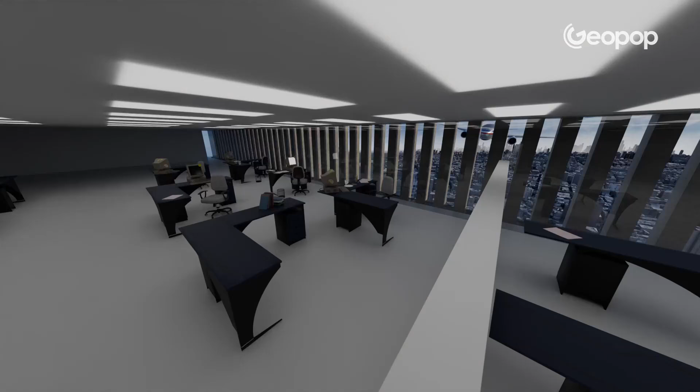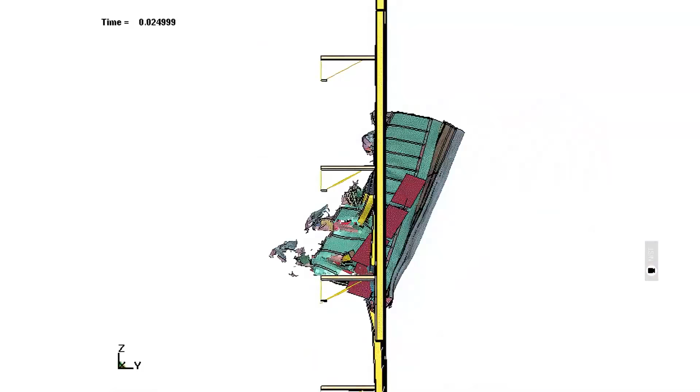See the engine and wings crashing into the building? These simulations of the impact really are shocking, and they aim to explain the reasons behind the most widely discussed collapse in history. What really caused the collapse of the Twin Towers?

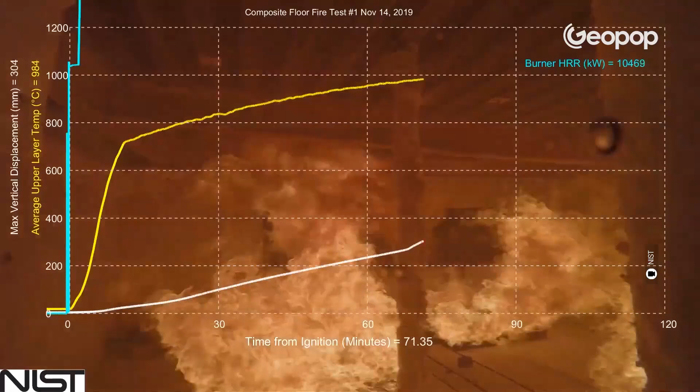How is it possible that they only took about 10 seconds to collapse? And what do we know about the much debated steel temperature issue? And what's more, several hours later, why did Tower 7 also collapse even though it wasn't hit by a plane?

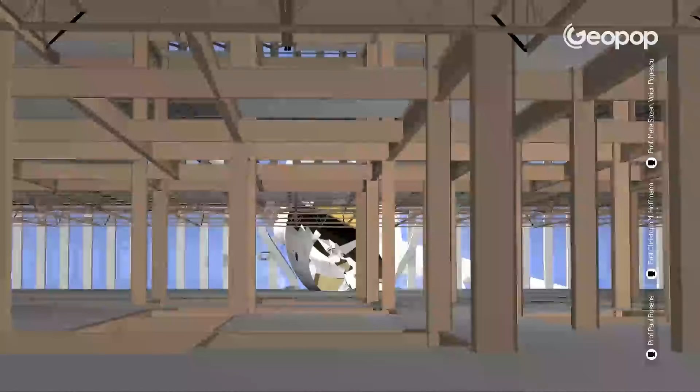Those of you who have been following Geopop for a while will know that we've made a number of videos on the World Trade Center disaster of September 11, 2001. In order to give you the most reliable and consistent scientific explanations possible, to provide further clarity, we've decided to put all the content created by our editorial team over the years together in a single video to try to answer the questions and address the aspects that have most fueled conspiracy theories about the attacks that literally changed history.

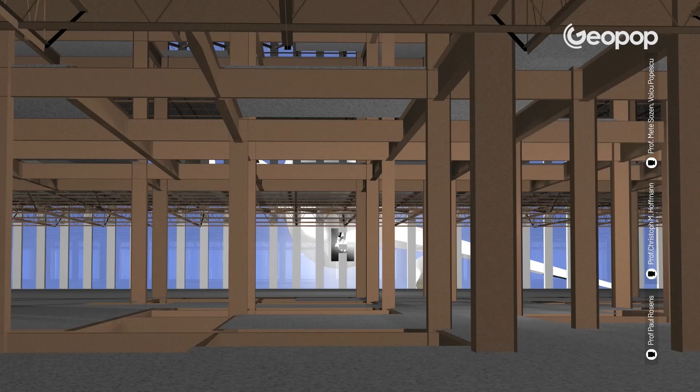I want to point out that nobody actually knows the absolute truth about what happened that day. Here we present you with the version that is most widely accepted by scientific experts, the one put forward by the NIST, the National Institute of Standards and Technology, one of the most prestigious scientific institutes in the United States. It analyzed thousands of witness statements, pieces of video evidence, photographs, and fragments of debris collected from the Ground Zero site, simulating scenarios in the laboratory similar to what happened that day to the towers.

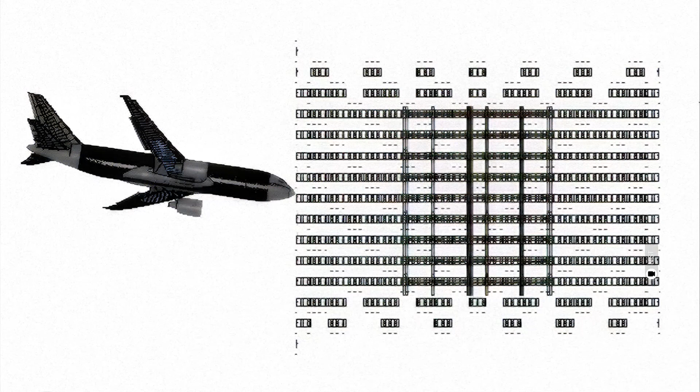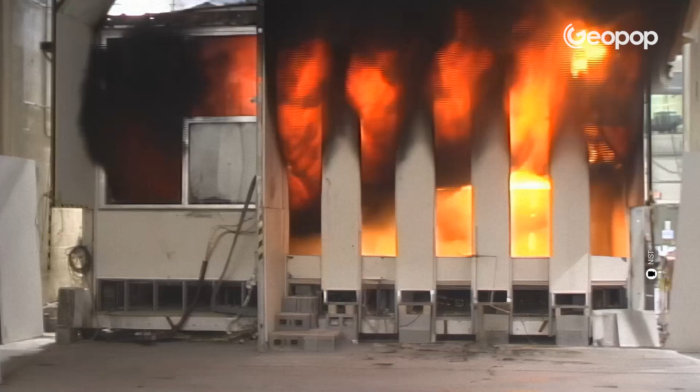So, understanding how the two buildings were designed and built is essential to comprehending the dynamics of the collapse, which, according to the NIST, was not directly caused by the impact of the planes, but was triggered by the subsequent failure of the steel due to the very high temperatures reached in the impact zone floors. But let's work our way through it methodically.

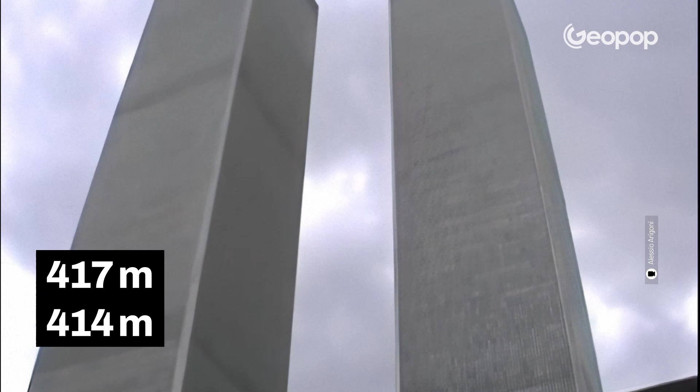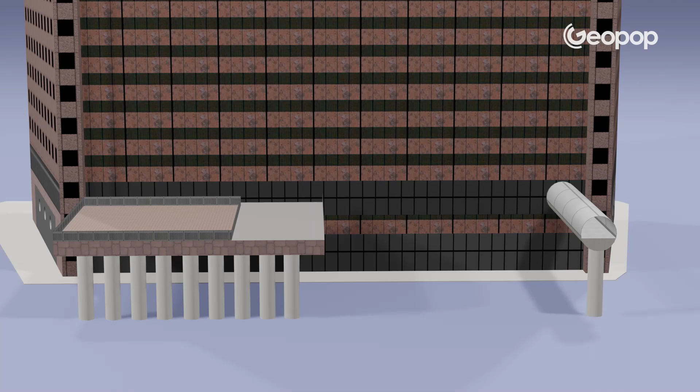Standing at 417 and 414 meters, respectively, each of the two buildings had 110 floors and was composed of 250,000 tons of steel. At the time, they were the tallest skyscrapers in the world, as well as the beating heart of the World Trade Center, designed by architect Minoru Yamasaki in 1962 to become a revolutionary economic hub, which was why it was called the World Trade Center, and which also included Tower 7, or WTC7, the third building that collapsed on the day of the attack, which housed the electrical substation that supplied power to the entire World Trade Center complex.

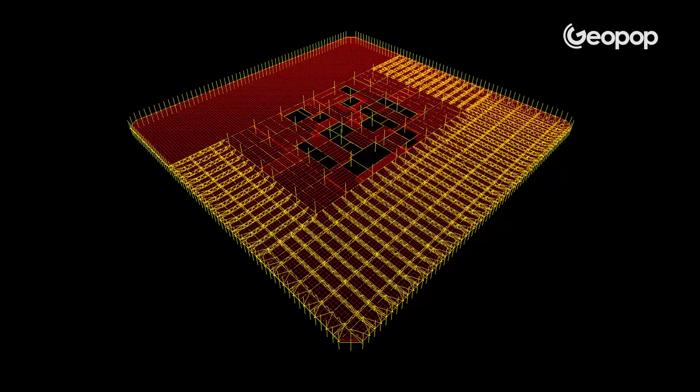Using steel to construct skyscrapers is one of the best ways to create ultralight structures that can be developed vertically. The basic idea was to make each floor a huge open space, uninterrupted by columns and support walls. For this to be achieved, the mass of the building had to be minimized, and it had to be able to support the vertical load, that is, the load of the people plus that of the structure itself, and the horizontal load, that is, the force of the wind.

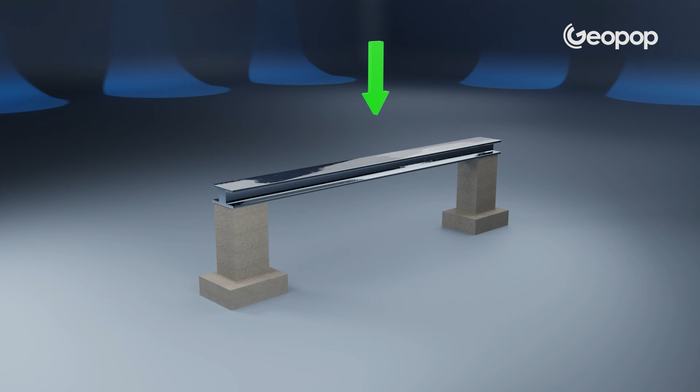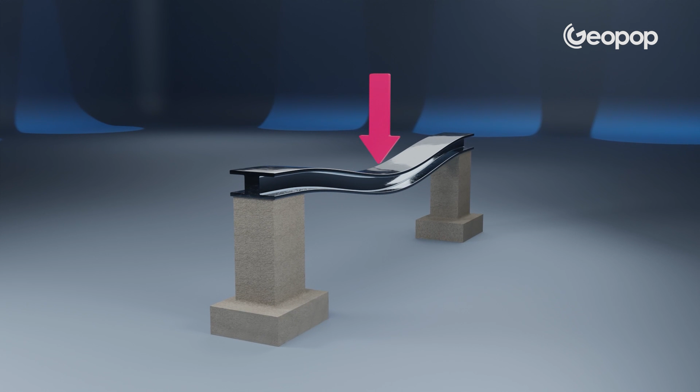Why steel? Because steel has elastic properties that allow it to react to loads with flexibility, but when subjected to high temperatures, it can weaken to the point of completely losing its ability to withstand certain loads, just as it did in the towers' case.

Holy shit! What happened? Oh my God! Oh my God! Oh my God! Oh my God!

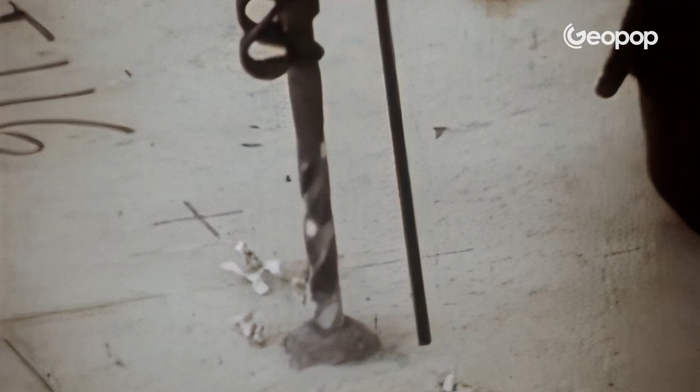Let's take a closer look at the structure of the towers. The structure was organized into four so-called major subsystems, four blocks that provided the building with structural redundancy or robustness, which made the towers very stable because, in the event of damage to one of the systems, the load would be redistributed to the other systems that were still intact. It's essential that this be explained if we want to understand the cascade of events that caused the steel to weaken.

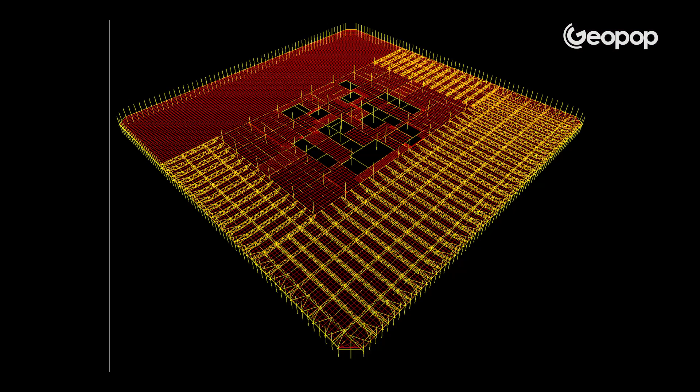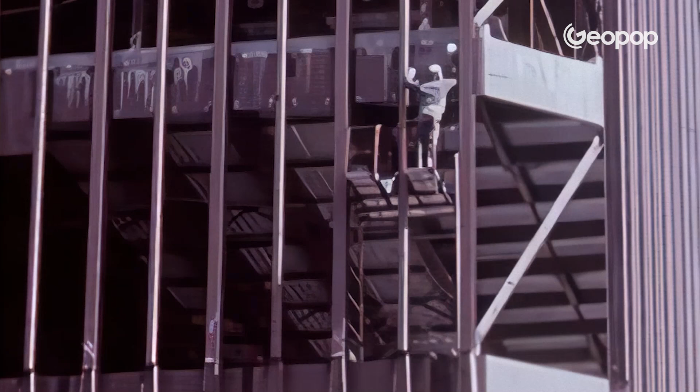The four subsystems were the exterior wall perimeter columns, the central core, the floor system, and the hat truss, essentially the roof. The perimeter columns were arranged along the perimeter of the building and provided resistance to lateral loads. There were 59 on each side, for a total of 236 around the entire perimeter. The central core was about 1,000 square meters in size and was located at the heart of the building.

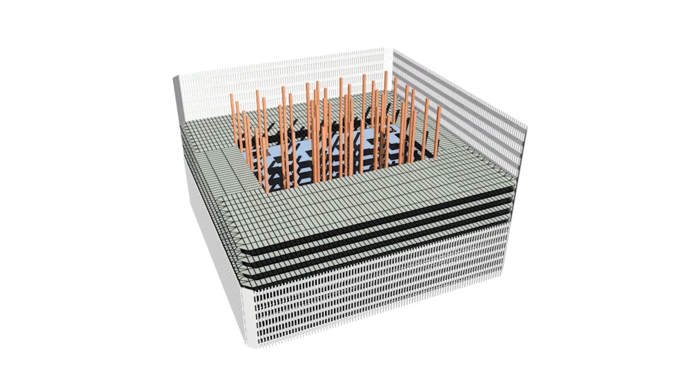It extended for practically the entire height of the tower, and inside there were another 47 support columns and service elements such as stairs and elevators. The third subsystem, the flooring system, was composed of lightweight concrete slabs fixed on steel platforms. The floor had the double function of supporting the perimeter columns and carrying part of the horizontal and vertical loads.

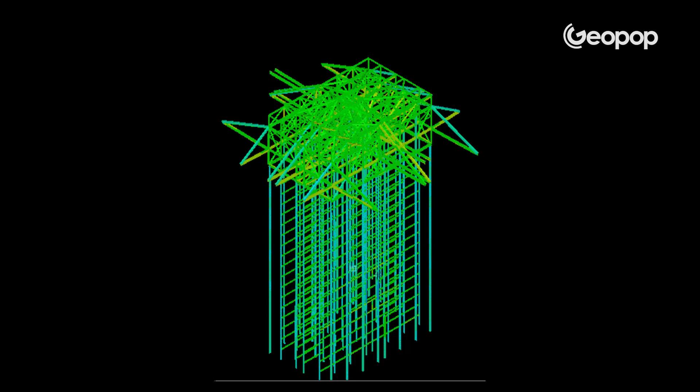Finally, the fourth subsystem, the hat truss, the roof structure, had the primary function of supporting the antennas, but it was also important in load distribution, as it provided an additional connection between the perimeter and the core structure. The North Tower and the South Tower of the World Trade Center were designed to withstand an additional one-third load. In addition to the gravitational load and the horizontal load, that of the impact of a 707 airplane, which in the 60s and 70s was the largest in the world.

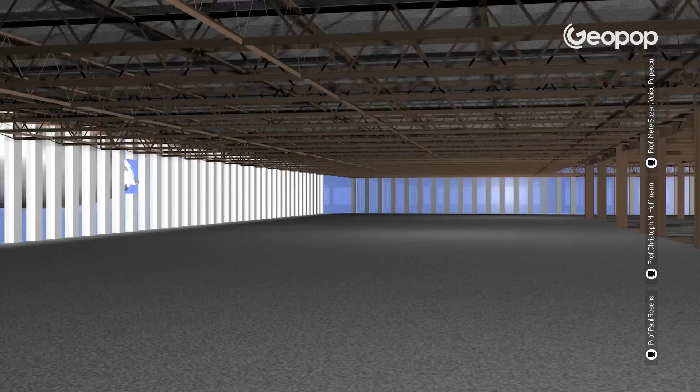Even though the American Airlines 767, the one that crashed, was much larger than a 707, the NIST specifies that it was not the impact itself that weakened the structure, which, on the contrary, only swayed by 30 centimeters. However, in a certain sense, it was the spark that triggered a series of contributing factors that eventually weakened the steel of the two buildings to the extent that they collapsed.

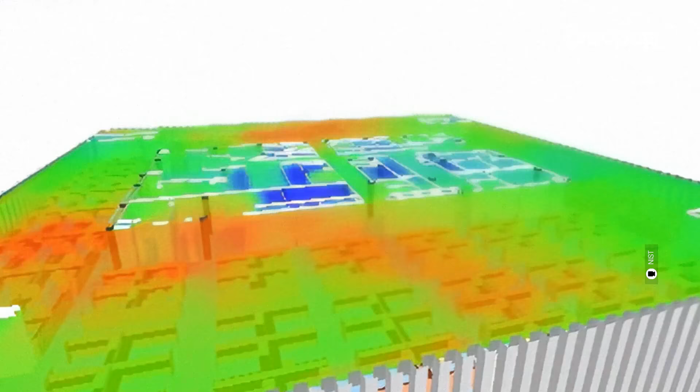At this point, let's take a look at the behavior of steel. One of the major technical doubts about the collapse of the Twin Towers focuses precisely on the fact that it's not possible that the towers fell because the steel melted, since this material melts at around 1,500 degrees Celsius, and in the towers that temperature was never reached. It's true. The temperature never got as high as that, but there's a more pertinent technical question we should be asking. What happens to steel when it's under stress and reaches temperatures that, while not as high as 1,500 degrees Celsius, are still extremely high?

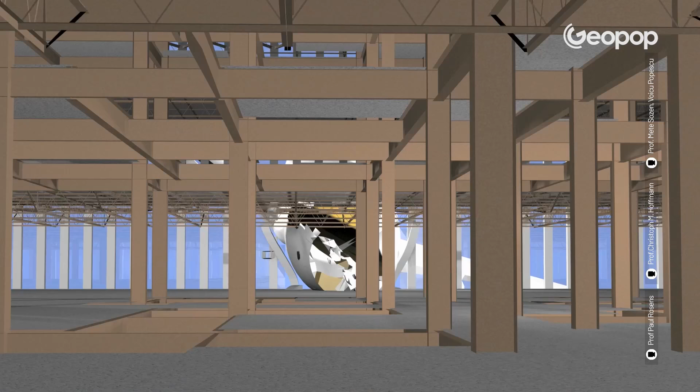According to the NIST simulations, the collapse was actually triggered by a loss of steel strength. It didn't melt, but it lost strength. To be precise, there was a loss of strength in some areas of the floors in the impact zone, where fires would have caused temperatures to increase to peaks of 900 to 1,000 degrees Celsius. At this point, it's important we understand how steel behaves from a physical standpoint when we apply loads and when the temperature rises. I therefore suggest we examine its behavior in two situations using two different graphs. Firstly at room temperature, and then as the temperature increases up to 1,000 degrees Celsius.

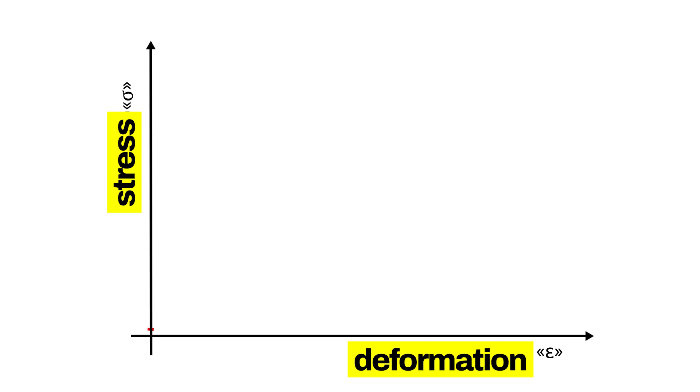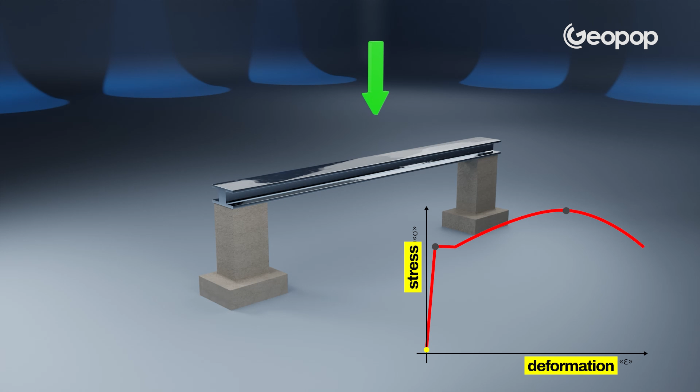On the y-axis, we have the stress. So for example, the load that might be applied to a piece of steel. The strain, or how much the steel component deforms in response to the stress, is plotted on the x-axis. What we have here is a typical stress-strain diagram, as used in engineering by experts in the field. This is how steel behaves at room temperature. Up until the yield point, also known as yield strength, as shown on the graph, the steel will behave in an elastic way. What does that mean?

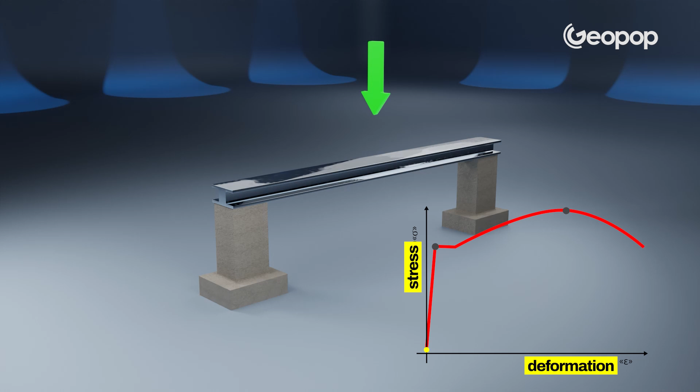Simply put, it means that if I remove the applied load, the steel will return to its original state, without undergoing permanent deformation. If, on the other hand, I continue to increase the load proportionally, once the yield stress is passed, the steel will deform in a way that is no longer proportional. We enter the so-called plastic phase. It's no longer elastic, but plastic, in which the more I increase the load, the more the steel deforms. And it's important to note that after this point, the deformation becomes irreversible. In other words, if I remove the load, the steel remains deformed.

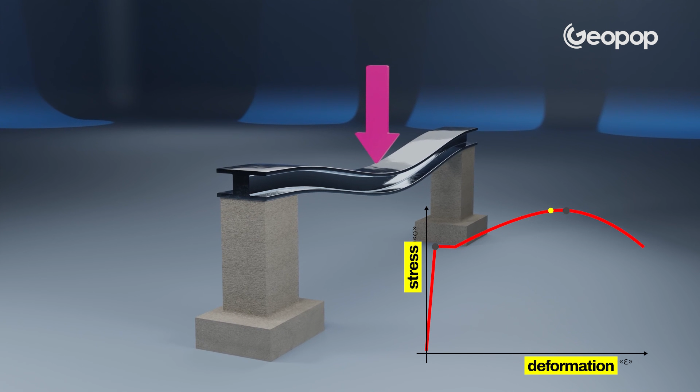It's deformed, but despite the deformation, it's still capable of bearing the applied load. However, if the load continues to increase, the steel reaches its breaking point, meaning the steel is no longer able to exert enough force to resist the additional load. In other words, the steel collapses. As I said before, this is an example of how steel behaves at room temperature. But what happens if the temperature increases?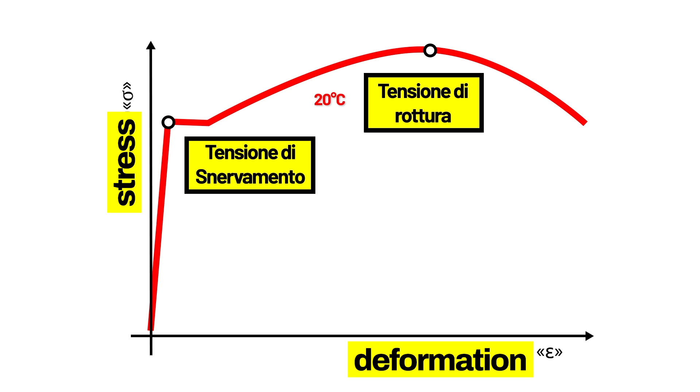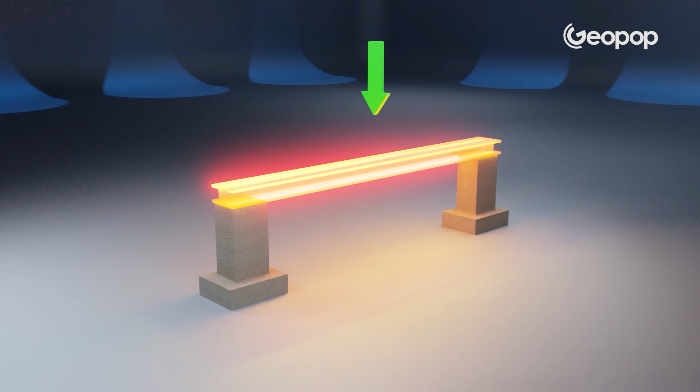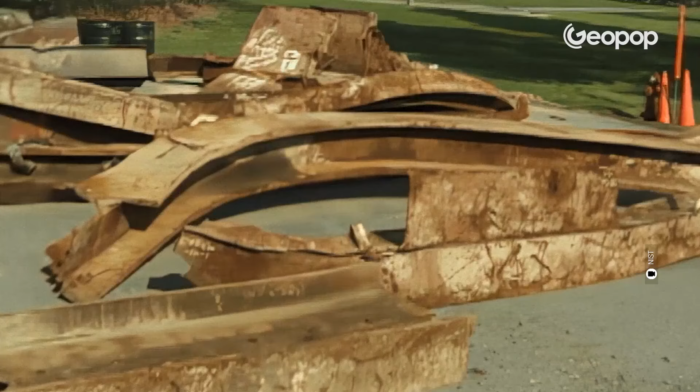Let's take more or less the same graph we looked at before, but this time we'll add in the temperature variable. As you can see, the elbow of the curve gets smoother and smoother. In other words, it means that with the same applied load, when the steel heats up, compared to when it's, let's say, cold, it reaches the plastic phase much sooner. In technical terms, it is said to lose stiffness, and similarly, its strength is reduced. In a nutshell, the higher the temperature, the more the steel deforms and the sooner it reaches its breaking point.

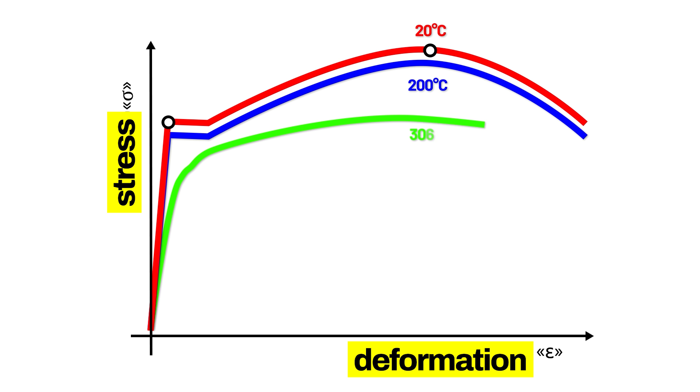According to European design standards, at 200 degrees Celsius steel loses 10% of its stiffness, but it's still within the elastic phase. Already at 500 degrees Celsius, if the load increases, the loss of stiffness and strength becomes significant, and the building's ability to bear loads decreases. At 1000 degrees Celsius, as specified by the NIST in its report, steel loses 95% of its load-bearing capacity.

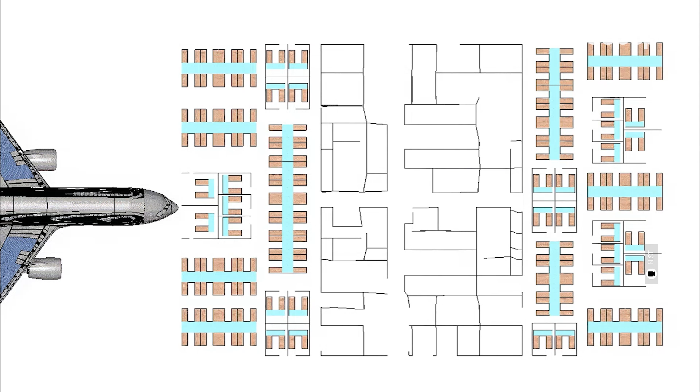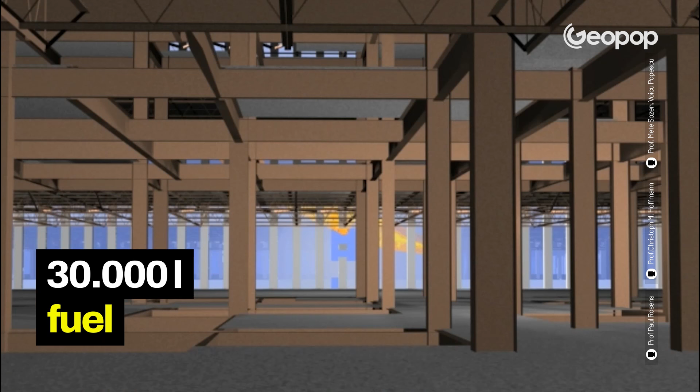At this point, the question is, how does the NIST explain the collapse as a consequence of the loss of steel strength? When the planes crashed into the towers at a speed of about 700 kilometers per hour, they literally disintegrated in less than a second due to the enormous difference between their weight and that of the structures. Each plane weighed 130,000 kilograms, while the weight of each building was around 450,000 tons, almost 10 times that of the Titanic. We have to keep in mind that the planes were carrying approximately 30,000. That's right, I said 30,000 liters of fuel each, which after the impact literally atomized into highly flammable droplets.

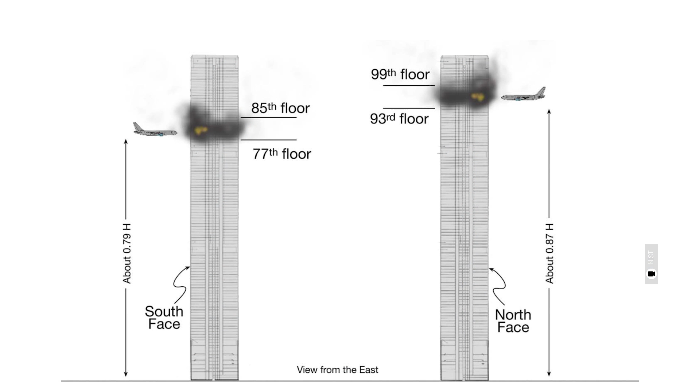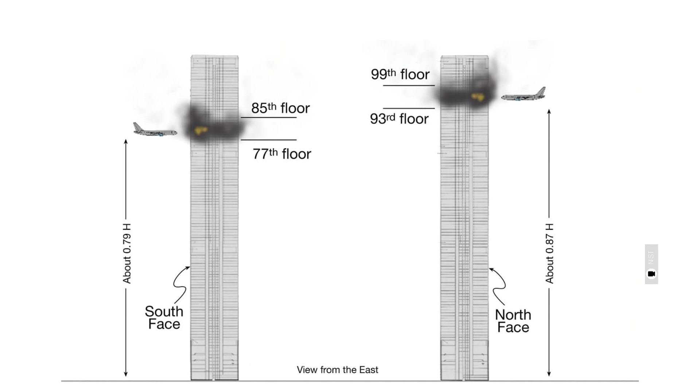The first plane, which struck the North Tower at 8:46 a.m. between the 93rd and 99th floors, severed 37 of the building's perimeter columns and 9 of its core columns. The second plane, which was more tilted on impact than the first, hit the South Tower at 2 minutes past 9 between the 77th and 85th floors, severing 33 perimeter columns and 10 core columns.

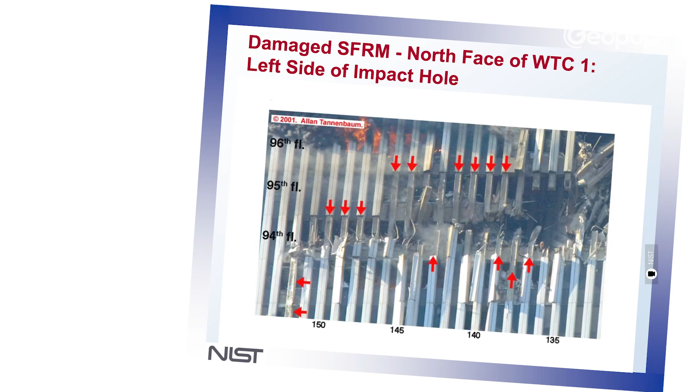On the floors involved in the impact, in both towers, the fireproofing material protecting the steel was almost entirely compromised. We're talking of 43 of the total 47 core columns in the North Tower and 39 of the 47 in the South Tower, in addition to thousands of square meters of flooring being completely stripped of insulating material.

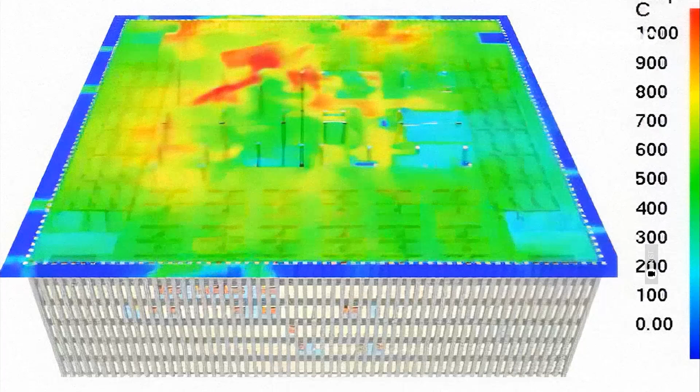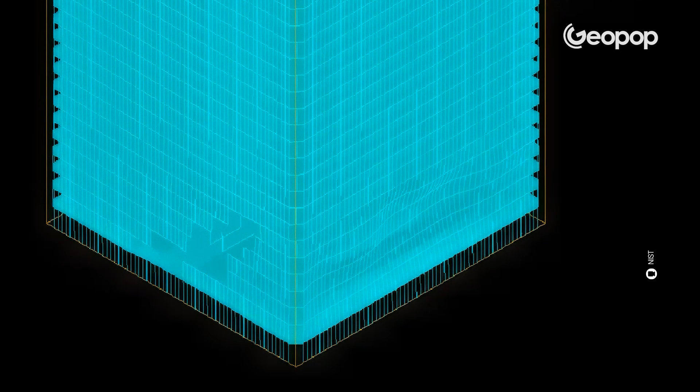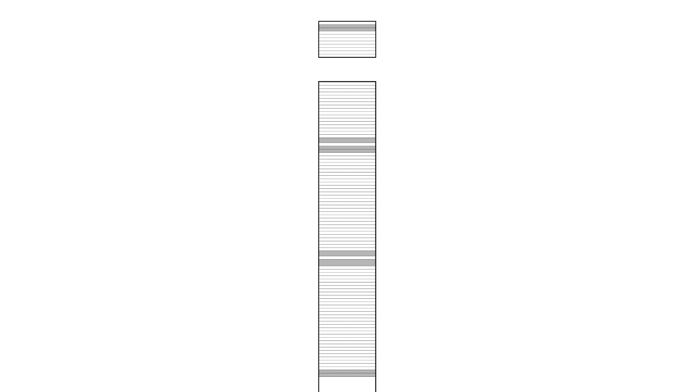Why weren't the collapses of Tower 1 and Tower 2 arrested by the intact structures below the impact zone floors? Through a series of complex mathematical calculations, the NIST determined that the columns supporting the intact floor below the levels of the collapse were adequate to carry the load of 11 additional floors if the load was applied gradually, and 6 additional floors if the load was applied suddenly, as it was in this case.

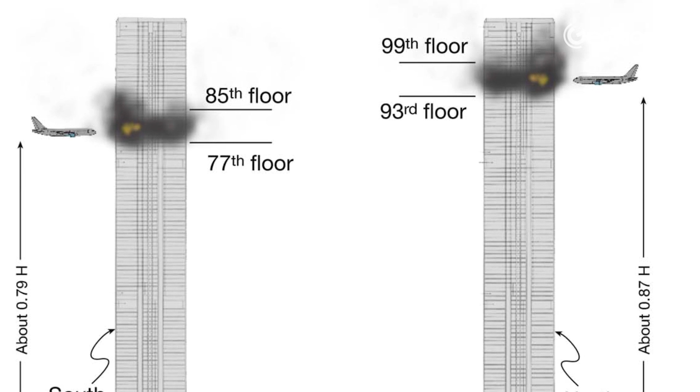Since there were 12 and 29 floors above the collapse levels in the North Tower and the South Tower respectively, neither tower could have stopped the progression of the collapse, especially considering that, as the weight of the floors below was added to it, the mass increased as it fell. The energy released was of such magnitude that the floors below offered practically no resistance. That's why, from the moment the collapse started, it took only 9 seconds in the case of the South Tower and 11 seconds in that of the North Tower for the upper sections of the building to crash to the ground.

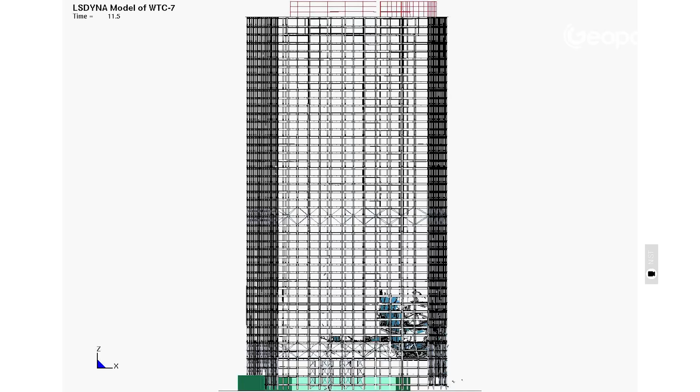At this point, let's move on to Tower 7 or WTC7. Why did it collapse if it was not hit by a plane? Perhaps what fueled the largest number of conspiracy theories was the destruction of Tower 7, which collapsed about 7 hours after the North Tower at around 5:20 p.m. Despite no plane ever hitting it, it crumbled in just a few seconds, much like the towers did. Many have insinuated that deliberate explosions caused the structural failure, but also for Tower 7, the NIST came to its conclusions after carrying out an in-depth investigation.

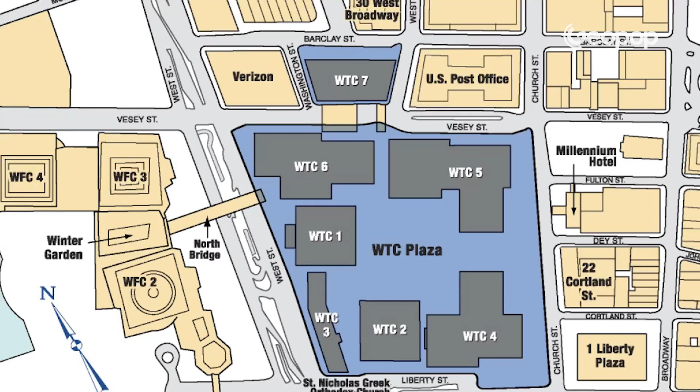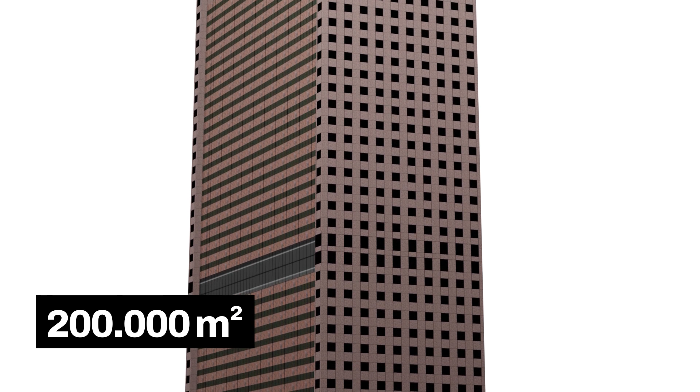Before I give you the NIST version, it's important that you understand the context and what kind of building Tower 7 was. We're talking about a 47-story building located approximately 105 meters from the North Tower, which at 10:28 was the second building to collapse after the South Tower on September 11, 2001. Tower 7 was shaped like an irregular trapezoid and had a total surface area of 200,000 square meters. In 1970, the construction of the first 6 floors was completed. Only 20 years later were the other 41 floors added to accommodate new offices. The structure, with a total of 47 floors, was completed in 1990.

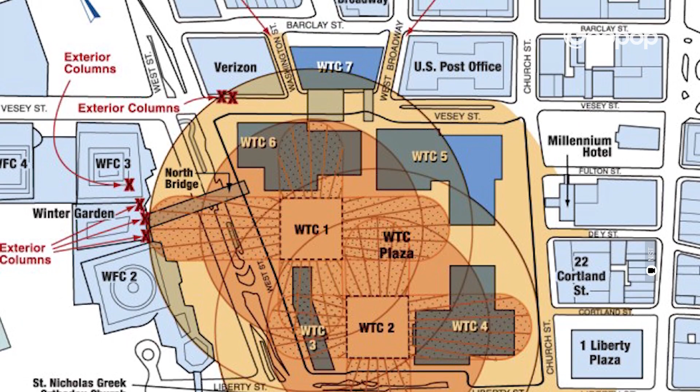On September 11, 2001, when the North Tower came down, burning debris shot out, hitting various buildings in a range of hundreds of meters, including Tower 7. In addition to damaging the southwestern part of the building, they caused fires on at least 10 floors, between the 7th and 30th floors. According to the NIST reconstructions, it was between the 7th and 9th floors and between the 11th and the 13th floors that there were favorable conditions that enabled the fire to spread uncontrollably.

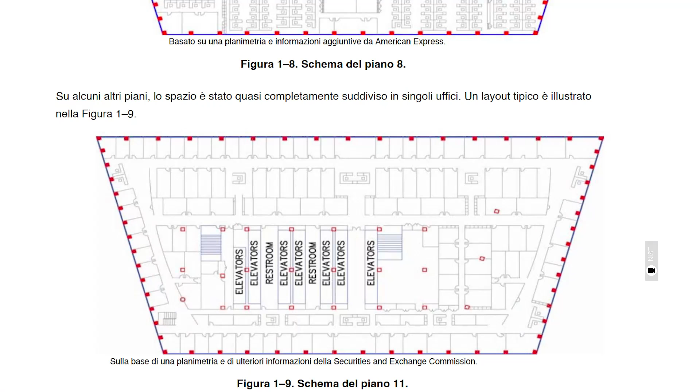Why were there favorable conditions? Most of the additional floors of Tower 7 were designed, as we mentioned, to house workstations and were therefore filled with combustible office materials, desks, printers, computers, and so on.

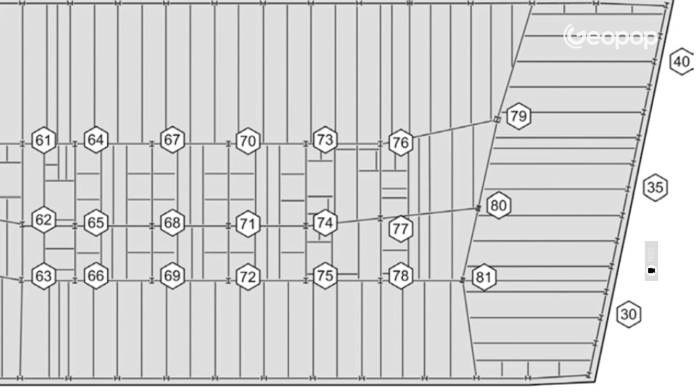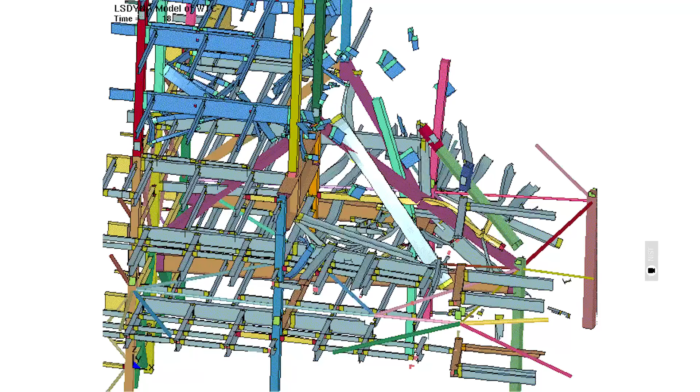The structure was supported by 58 perimeter columns and 24 internal columns, 21 of which made up the central core. The other 3 internal columns, numbers 79, 80, and 81, had the primary function of supporting the floors that connected the core and the east side of the building, which were longer than the other floors due to the irregular shape of the building. Now, this is a crucial point because the collapse was triggered precisely by the failure of one of these 3 columns, number 79.

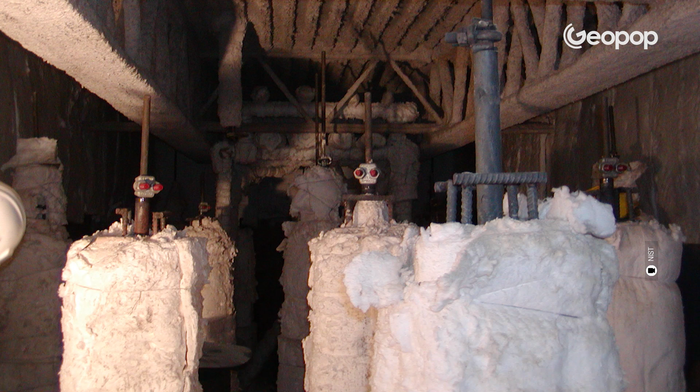So let's look at the dynamics of the collapse of Tower 7. The floors were made of metal beams coated with reinforced concrete. The beams and concrete distributed the weight to each other and in turn distributed it to the columns. Both the floors and the columns were coated with fireproof material, a protection against fire, calculated to increase the resistance time by 2 hours for the floors and 3 hours for the columns.

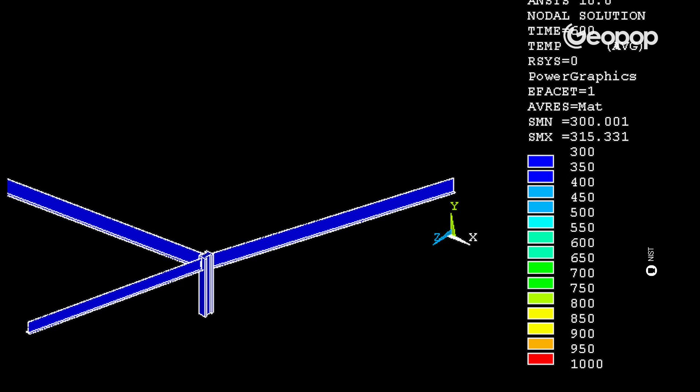Due to the high temperatures, which reached around 600 degrees Celsius, the beams and floor connections, which were covered with thinner fireproof material compared to the columns, heated up first, and the so-called phenomenon of thermal expansion occurred. When steel is heated, in fact, its volume increases, and if this expansion is constrained by columns or other steel elements, forces develop that can create instability.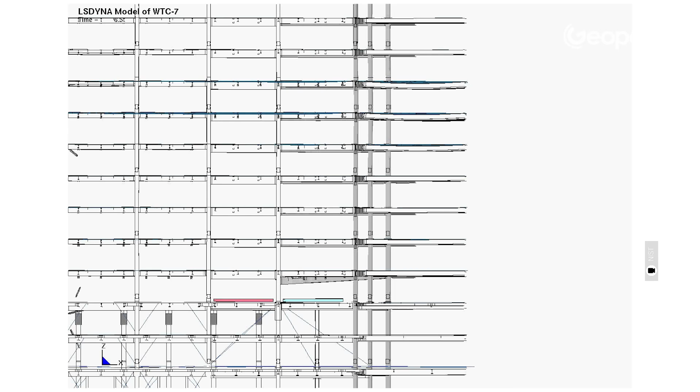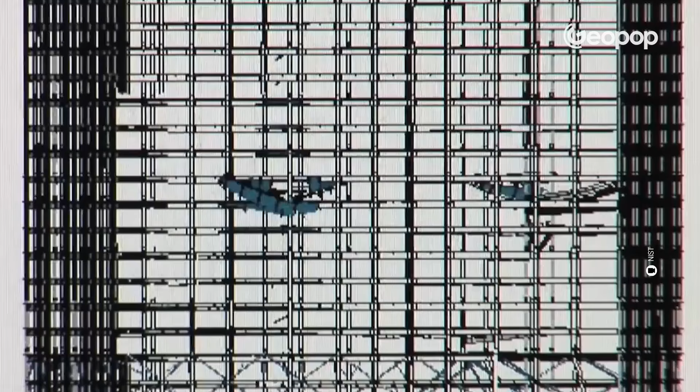According to the NIST, this is exactly what happened to the long spandrel beam that connected column 44 to column 79. Distended by thermal expansion, as well as inevitably weakened by the high temperatures, the connection with column 79 was broken, initiating this so-called progressive collapse. In other words, the propagation of localized damage from one structural element to another, leading to the collapse of an entire structure. The floor of the 13th floor lost its support and collapsed. Column 79 basically bent downwards, setting off a collapse that cascaded through the floors below until the global collapse brought it down all at once.

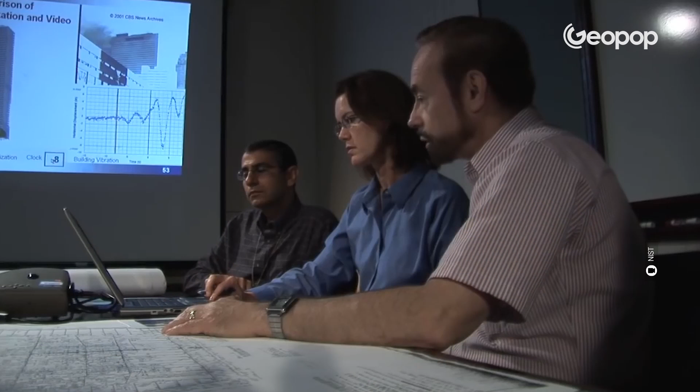Now, why did the NIST rule out explosions? The NIST provided two explanations after reconstructing the exact same scenario in the laboratory. An explosion would have destroyed most of the windows that had instead remained intact until the time of the collapse. An explosion would not have caused the building's walls to crumple inward. It would instead have made them shoot outward.

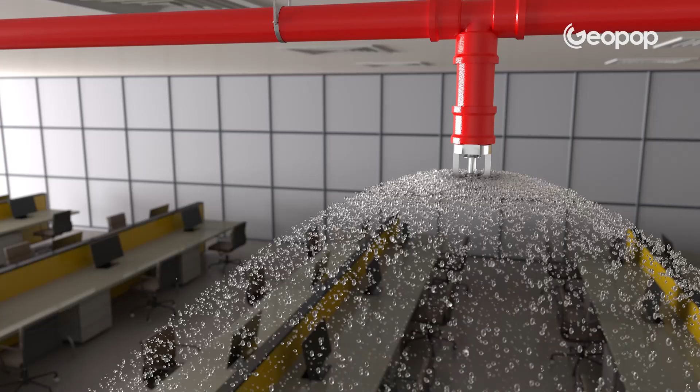Another question you will find around the web is, why didn't rescue teams intervene, and why weren't the fire suppression systems activated? The collapses of the towers had caused dozens and dozens of casualties, including among rescue workers, who suddenly found themselves dealing with a never-before-seen situation. What's more, Tower 7 was surrounded by smoke from the debris, and most importantly, all water sources were damaged. Extinguishing the fire under those conditions proved practically impossible. Fortunately, the 4,000 people who were working in Tower 7 that morning had been evacuated after the impact of the two planes into the twin towers.

In conclusion, this reconstruction, which is embraced by the vast majority of the scientific community, presents us with a perspective that's somewhat different from what's been said over the years. Namely that these structures actually withstood the impacts and remained standing for a long time considering the damage they sustained. For example, if the towers had not been so structurally solid, the loss of human lives might have been 10 times greater. So, if you happen to talk to a civil engineer, they will probably tell you that the twin towers performed excellently from an engineering standpoint, because they withstood movie-like damage for around an hour.

Of course, with this video, we're not trying to convince anyone that it happened exactly this way. It's something that's very complex and doubts will remain for many, of course, but I think it's interesting to look at certain technical scientific aspects, ones that are perhaps less talked about, but actually go a long way to explaining, if not everything, a lot.